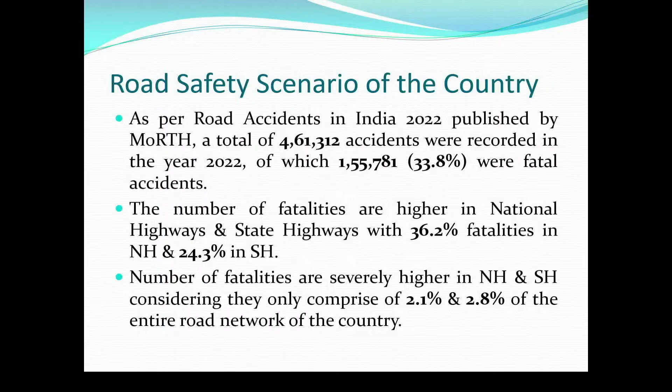If we see, even if we consider the national highway and the state highway together, they constitute around 6% of the network of total roads in India, and together they carry 55 to 60% of road fatalities. What about the other categories of roads within the jurisdiction of state governments? That network is about 6.3 million. What to do with that vast network? This network is concentrated, and its problems are totally different from the other roads. Here comes the role of road engineers—we have to have different strategies for different categories of roads.

As far as black spots are concerned, these are the areas which are prominent on the roads and can be easily addressed. But unfortunately, they constitute only 4.5% of the total road network on the national highways and state highways. So what about the remaining? We do not know what to do about it.

So we have to have a corridor approach. If we want to address the problem of fatalities, we cannot leave the remaining 95% of the network without addressing the engineering problem. Now for black spots, we have a methodology for identification. And what about the remaining network? For that, we in the ministry have experimented a bit to find how to approach the whole network.

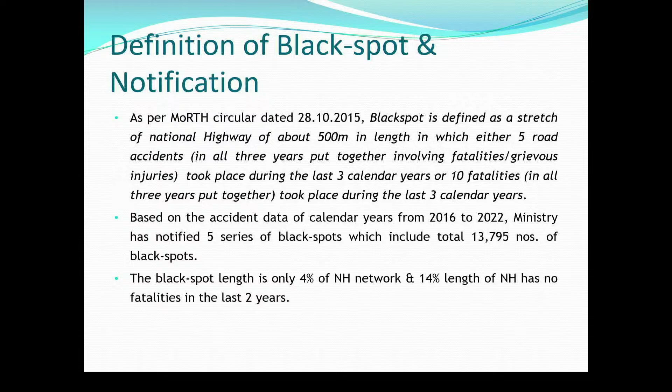The Center of Excellence, IIT Madras, was requested to carry out an analysis with the help of whatever eDAR data was available with them. It was found that 14% length of the 80,000 kilometer road has not witnessed any death in the last 2 years. With a criteria that the minimum length of the corridor should be more than 5 kilometers, you will wonder that 14% is significantly higher than the black spot stretch we are focusing on. So we changed our strategy and asked the questions.

So what to do with these stretches? Is there an engineering fault in it? When we compared this 14% aggregated length with the remaining adjoining stretches, we found there is no engineering defect. These stretches are as good as the stretches where there is death.

So now where to lay the blame? There is a blame game that it's a fault of the driver or it is a fault of some other event. So we have to identify what a highway engineer should do. What should we do to address these problems? This is the point I want to explain, how to address this.

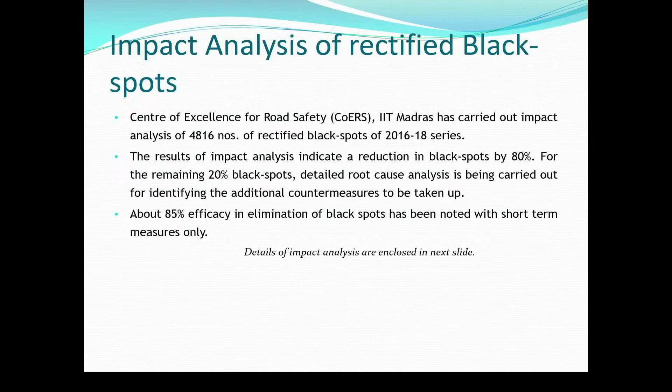This is the impact analysis which I just shared with you. The same experience, with details, was carried out by the IIT Madras Center of Excellence.

My request to the state government people is that the strategy for state highways, which are high speed corridors, should be like the national highway approach. For the remaining network, which is low density and low speed corridor, black spots should be addressed first. Maximum black spots are on the national highway and state highway, and the remaining network, about 6.3 million kilometers, being minuscule in density, cannot be covered on a corridor basis.

So eDAR data is already available, and the eDAR facility is available to all state governments. There you can select high accident locations and address those spots. You have to have a point-based approach, and we can achieve the maximum reduction in fatality at that point.

As regards the funding of those stretches, we can make a district level integrated program, including the national highway, state highway, and other roads, where you can have different strategies to address the different kinds of problems.

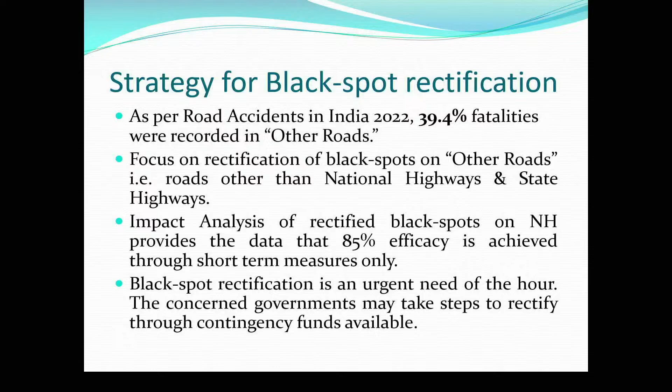This we have already discussed. Now, after the black spot, what about the corridors which are neither falling in the white corridor portion nor within your black spot corridor? There you have to have a corridor approach. At least you should carry out the road safety audit of 50 kilometer road length,

and also observe the operating speed, and segregate the urban sections and the rural sections, which is the main reason for accidents. Because we design the road at 80 kilometer per hour speed, but when we operate on the road designed for 80 kilometer, because of the roadside development and population, since the road is shared by the people also in India and population density is very high, you cannot maintain the same operating speed over longer stretches.

After every 10 or 15 or 20 kilometers, you will face one settlement and another settlement. So you have to adjust for the speed. That is the main reason for higher fatalities on such corridors. The best way is to segregate it speed wise. Suppose you have a consistent operating speed on this particular section, and for the remaining you have a different operating speed consistently. So you can plan accordingly.

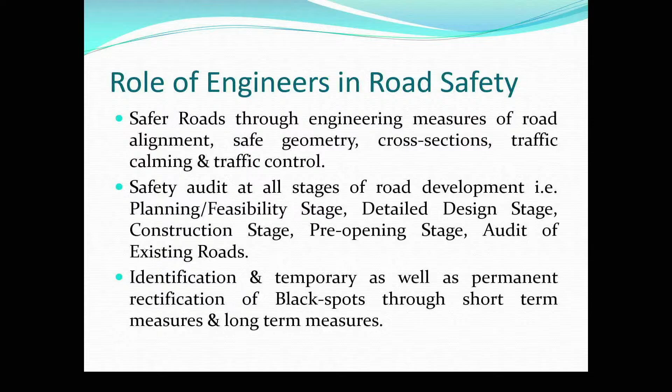It can help you to have a proactive approach to black spots. In the black spot definition, you have to wait for 3 years. So in the ministry, we experimented: should we wait for another 3 years for the formation of the black spot? It was decided no, it cannot be business as usual. So first, wherever there is a fatal accident, each and every spot should be visited, and after visiting it should be decided whether really some engineering measures are required or not.

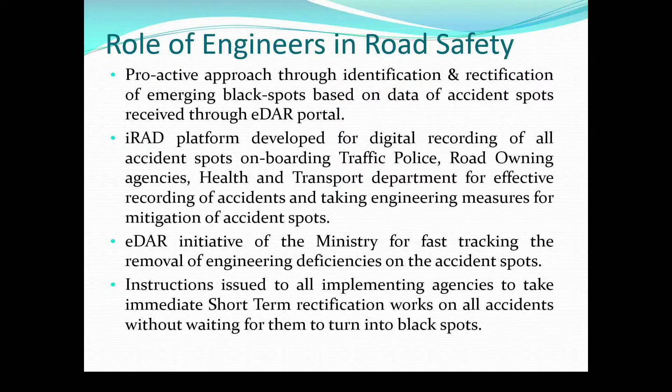If no engineering measures are required, it should be recorded by the engineer that the road is perfect. Thereafter we can go to the spots where engineering measures are required, and there the first step is to provide temporary or short term measures, so that it should not qualify as a black spot. And we should observe, even if it is shifting, there is some reduction in black spot formation. White corridor we have already discussed.

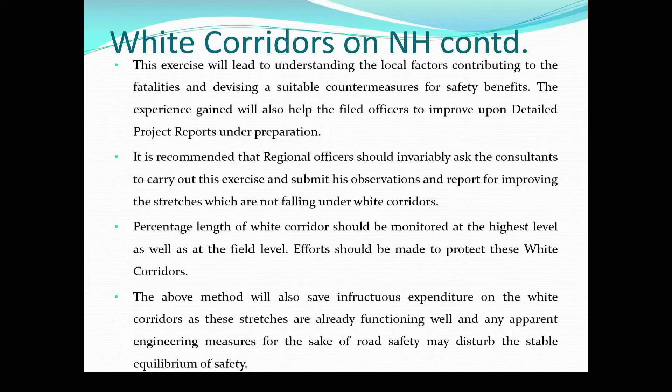We should have forgiving highways. First of all, for forgiving highways, we have to address the need of speed management. We have to decide what are the speed corridors. We have to segregate on the basis of speed. Then according to that speed, we have to provide the transition zone. Suppose an urban area is coming, so we have to forewarn him. Urban area is coming, proper signage should be provided.

It should be followed by traffic calming measures, irrespective of what was the design speed you considered at the stage of designing it. That should not be completely ignored. But where there are settlements and the area is being used by people, pedestrians, cyclists, the speed should be moderated irrespective of the design speed at the time of design. That can only help us to reduce the deaths.

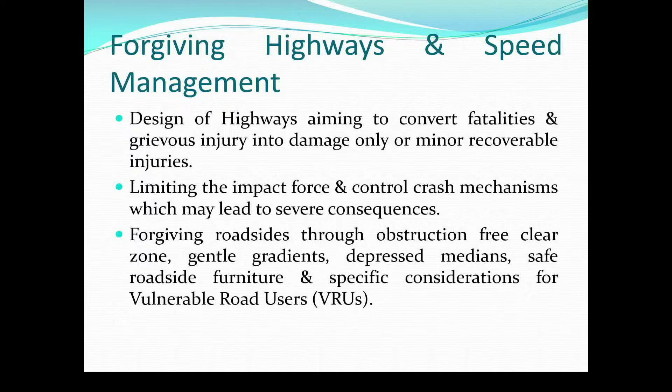And more infrastructure should be provided for the vulnerable road users, typically pedestrians, cyclists, and wherever there is a high density of two-wheelers, preference should be given to two-wheelers. For speed management, right now we do not have any network of monitoring speed. Some say that we should apply ITMS, but it is at the preliminary stage. Although NHAI has tried some, we do not have enough data for controlling speed, and it requires integration with the police and technology people, so that enforcement can be made effective, but it is not happening at this stage.

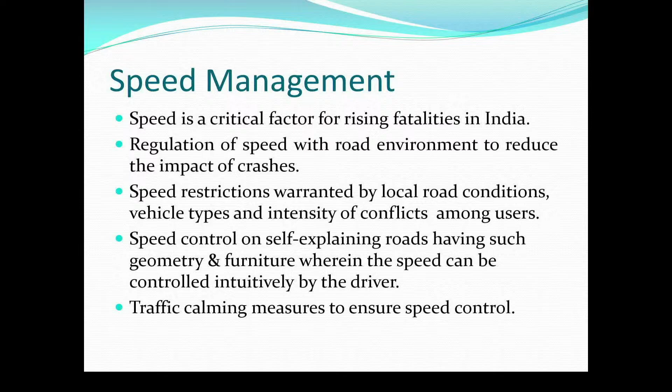And I would like to share one table from the safe system approach. It clearly mentions what the safe system speed is. So this should be kept in mind: roads and road sections with possible crashes of cars with vulnerable road users. It clearly indicates that the safe system speed should be 30 kilometer per hour, and this should be the criteria. Suppose there is a 100-kilometer two-lane road, and we have designed it at a design speed of 100 or 80 kilometer per hour.

But whenever we reach sections where the crash data indicates fatalities with cars or scooters and pedestrians are dying, we should not care about the design speed. We should only think that the safe system speed is 30 kilometer per hour, and we should sacrifice the speed and design it as if it is 30 or 40 kilometer per hour, irrespective of any code provision of IRC 73 or whatever. If we want to reduce fatalities, the same approach should be adopted preferably at the time of design. We should not be fascinated by the design speed. We should sacrifice that speed and try to build in the safety.

Same way, the road section with intersections with possible side-on crashes. There you will observe such things where there are a lot of junctions, the weaving lengths are not available, and junctions are not properly designed. There you can adopt the safe system where speed is 50. And the road section with possible frontal head-on collision, that is a two-lane road, the safe system speed is 70.

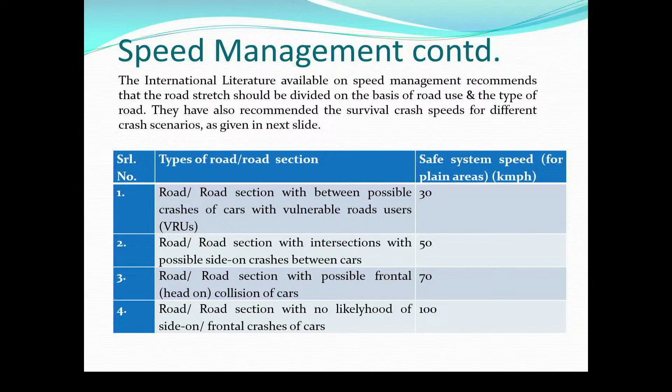District Road Safety Council, we have constituted; it is mandatory for the District Road Safety Council to have meetings. Unfortunately, District Road Safety Councils are not equipped with road safety auditors. So my request to all the state governments is, because IAHE is ready to provide road safety audit training to all state government officials and engineers, whosoever wants, free of cost. Only they have to bear the TA/DA cost. But nobody has approached the IAHE or the ministry for the training of their engineers.

So my request would be for all the chief engineers or all the people of the state government to send at least 2 persons from each district who should be trained free of cost for the road safety audit.

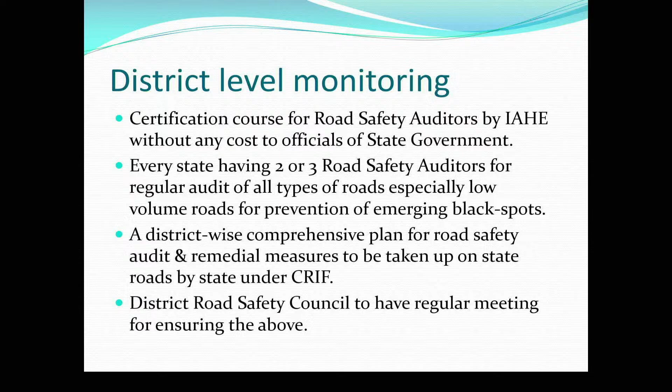Thank you, Mr. Pankaj, for giving the in-depth knowledge of the road safety scenario and perspective of the ministry in improving the road safety of the national highways in India. Now, I would like to request Mr. Tushar Vyas and Shri Amit Munjal for making a presentation on inventory and condition survey using NSV in NHAI.

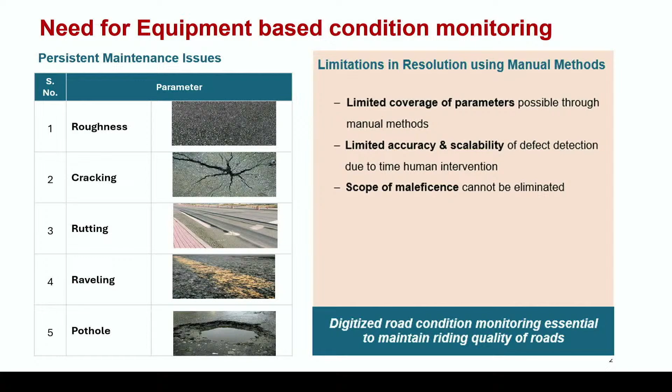Second, the accuracy and the scalability are also limited. And there is always a doubt on the data because the chance of manipulation is always there. So what is the existing arrangement of NSV? In the existing contracts, where the ministry has already introduced NSV, the authority engineer or the independent engineer conducts 2D testing, prepares the report manually and submits that report through the data lake to the RAMS cell in the NHAI headquarters. And after data cleansing by the RAMS cell, it is submitted to the RAMS portal.

Now what is the issue in this system? The first issue is incomplete data collection. Second, which we have paid the price for heavily: the survey was conducted 6 months back and we are receiving the report after 6 months.

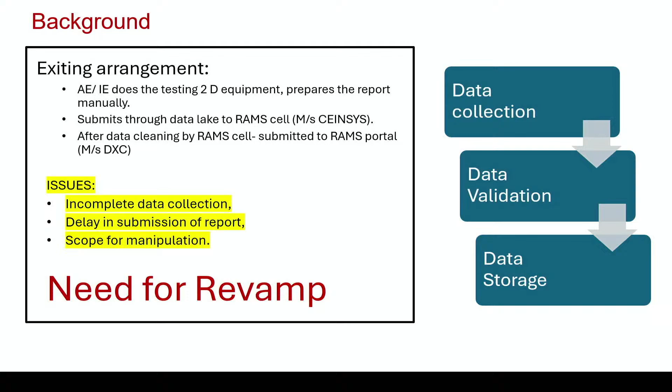And lastly, as I have already told you, there is always a scope of manipulation because manual intervention is there. This is the machine which we are now using for conducting the network survey. This is a very high-class, very modern machine, and its components are given in the figure.

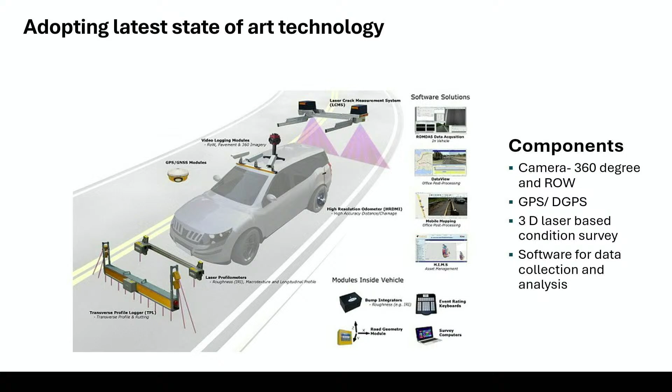And what we are doing at present is that in this NSV project, the data is captured by the centralized NSV agency, which NHAI have engaged through a separate contract. In 48 hours, whatever data has been collected by the NSV is transferred to the NHAI headquarters. In the NHAI headquarters, there is a separate team, a separate cell, which looks after these reports, in which 20 to 25 young engineering professionals have been placed.

And the reports which have been sent by the NSV team on the ground are processed, the report is generated and reviewed by the expert in 10 days, and in 2 to 3 days it is onboarded onto the GIS dashboard. So this is the point I would like to highlight.

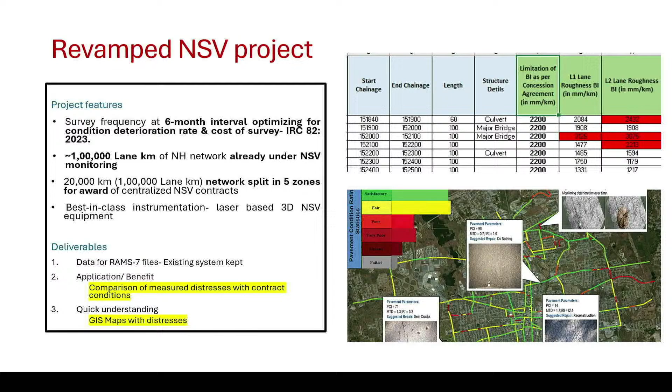This is one particular aspect in which you can see there is a crack. This is a particular result of the NSV survey which we are carrying on, and in this we can also see a pothole with location. Our survey is giving the location and also the type of defect. In the left part there is cracking, in the top right slide there is a pothole.

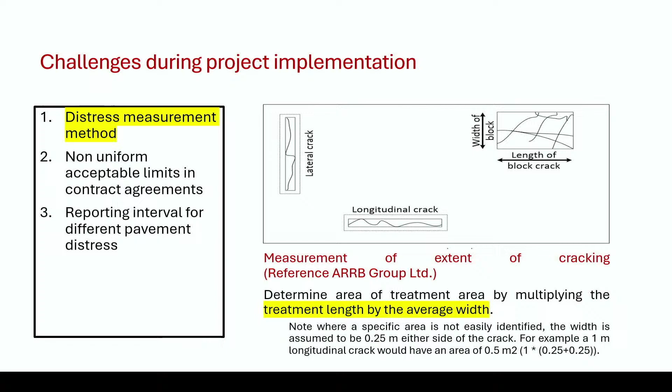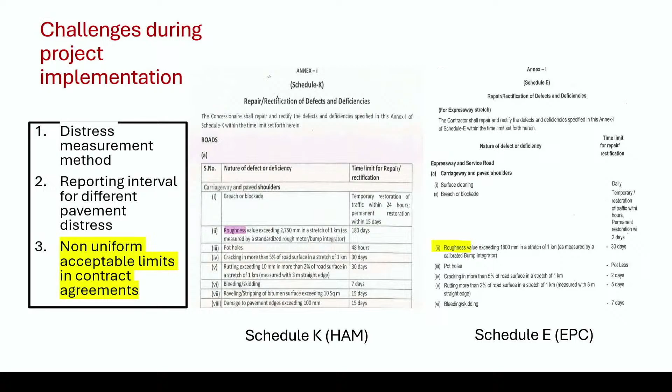Sir has given the context of this revamped NSV project which NHAI has now started. I will discuss what we are now getting, what are the outcomes of this project. So we have 3 deliverables in this project instead of 1 which we were getting from last many years, which is deliverable number 1 in this project also. We have kept this deliverable intact in this new project, which is related to RAMS. All the data required by the RAMS we have kept intact in this project also.

But additionally, 2 deliverables have been added. Second deliverable is comparison of the measured distresses with contract acceptable limits. This is very useful for professionals working in highway sector, because most of the time we are doing the contract management. In this project, we have linked the NSV outcomes with the contract acceptable limits.

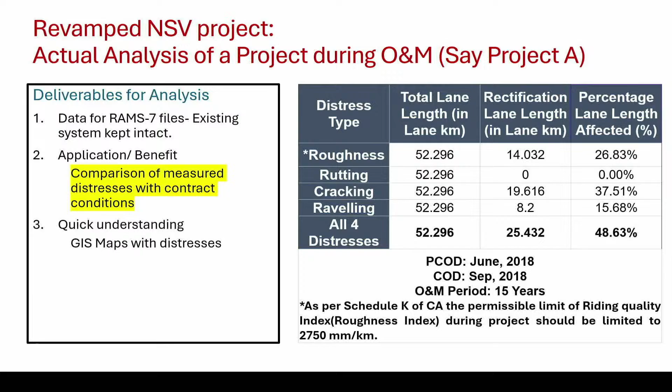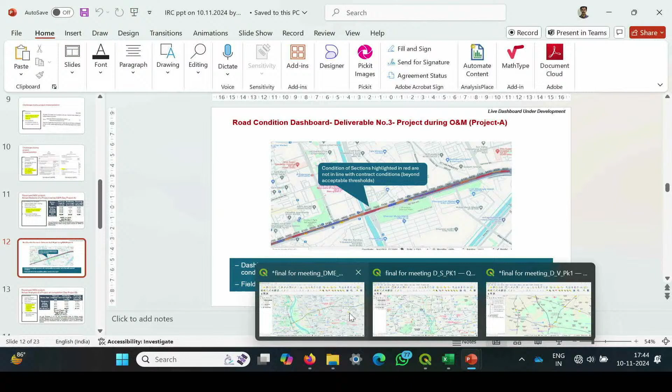Our deliverable number 3 is showing this huge data, which is normally in Excel files. Lakhs of cells are there. It's difficult to analyze it quickly. We have developed a tool in which these distresses are being presented in GIS color-coded maps. I can show this in real time, that this is the project, and if I have selected roughness as the layer on this GIS map, we can zoom in and see based on roughness, this color-coded map has been prepared.

We can see all 6 lanes with the chainage where roughness is under permissible limits, that is 2000 mm per kilometer, where it is under fair moderate condition, which is 2000 to 2400 mm per kilometer, which is shown in orange or yellow, and the sections where it is not fulfilling our contract acceptable limits, that is red.

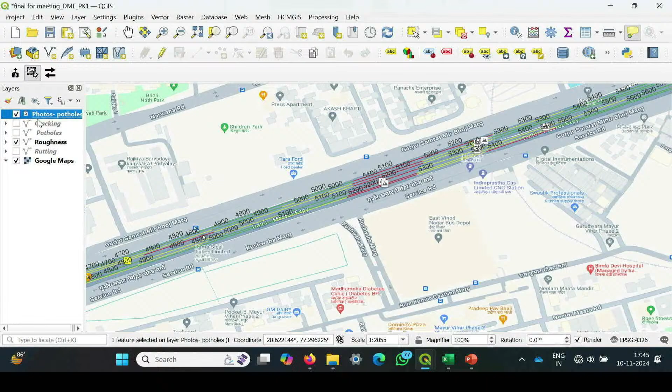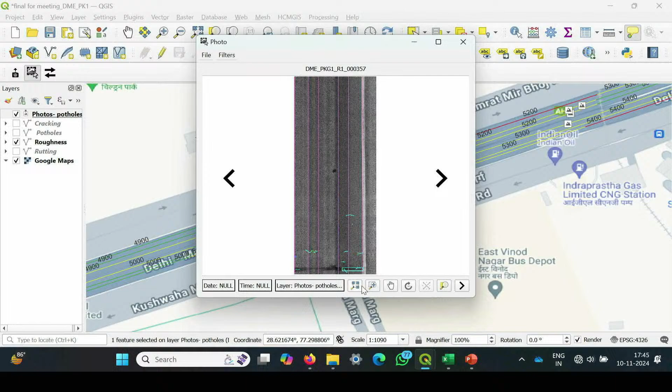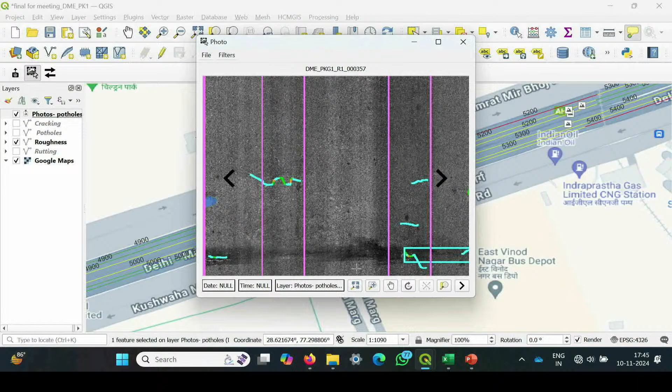In this, we have also taken the photographs of potholes. If I select this layer, which is photos of the potholes, we can see it will pop up all these photographs. And if we select this photo, we can even zoom in sitting in our office and see different cracks and potholes. We don't need to go to site if we have this kind of data with us. So this is a new deliverable we have added.

This was the project under O&M. We have also done, for understanding purpose, one project which was recently completed, and the proposal came for issuing of completion certificate. When we did this NSV testing under this new revamped project, you can see that 30.18% of lane length is not fulfilling our acceptable limits.

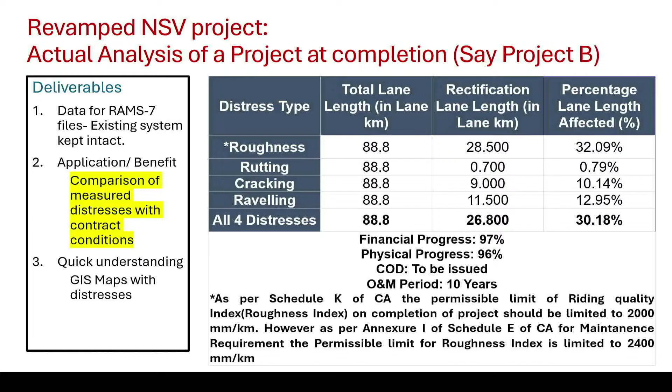So this project has been planned in a phased manner. Phase 1 will cover around 25,000 kilometers, capturing around 1 lakh lane kilometers. We will follow the existing contract acceptable limits in this phase, and phase 2 will cover all the O&M stretches, which will be more than 40,000 kilometers center line. And in phase 2, we had planned the introduction of PCI, but we are glad to inform that we have shifted this objective from phase 2 to phase 1. Now, in the current project itself, we are doing PCI categorization.

Also, the distresses being reported through this NSV testing shall be integrated into the NHAI One mobile application, which is being used by our supervision consultants and our field units, so that these defects which have been observed by NSV can also be rectified in the existing system.

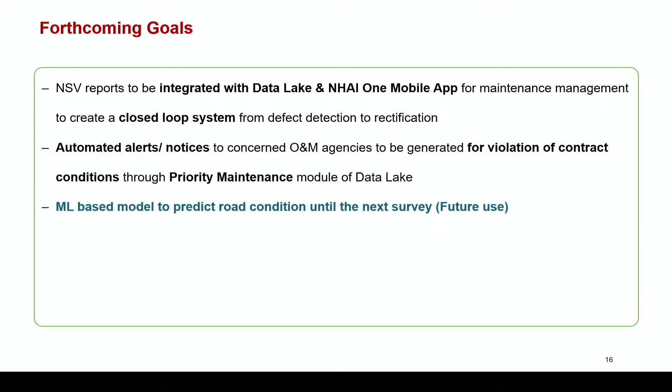Also, the issuing of notices and alerts to the supervision consultant and to the contractor or concessionaire is being planned in an automated way. And we have also received a new suggestion that, based on the quality data we are getting, we can now deploy a machine learning based model to predict the road condition in the future.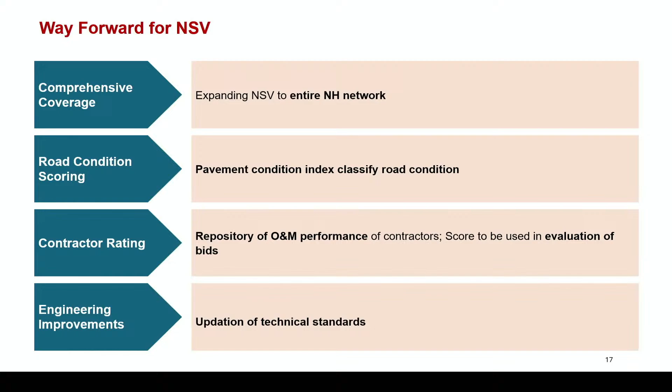So the way forward of NSV in NHAI is that, as we already mentioned, we will be expanding to the entire NH network. We will be doing road condition scoring based on PCI. Also, we are planning to do contractor or concessionaire rating based on the PCI, so that in future this information can be used in bid evaluation also. And last but not least is continuous engineering and equipment improvement, where our technical standards and acceptable limits shall be improved based on the learnings.

Thank you. Thank you, Amit. I must place on record that Amit Munjal has done excellently in NHAI in developing this NSV cell, and he has put a lot of effort into developing this module. So I must appreciate the work done by Amit Munjal.

Thank you, sir. And particularly as a way forward, NHAI is now moving further to rating of the contractor based on the NHAI One application, in which each and every defect is recorded live, and there is an automatic system of putting a penalty on the contractor. So there should not be any kind of subjectivity; everything is live and on the record.

So it will put an automatic penalty on the contractor for not maintaining the road in good condition, depending upon the set criteria already fixed. So we are moving further in this direction, and by utilizing AI we will improve further. I think this will pave the way forward for NHAI to maintain good quality roads. Thank you.

Now, I would like to invite Shri Narendra Sharma for construction of the major bridge across the Sharavathi backwater in Karnataka.

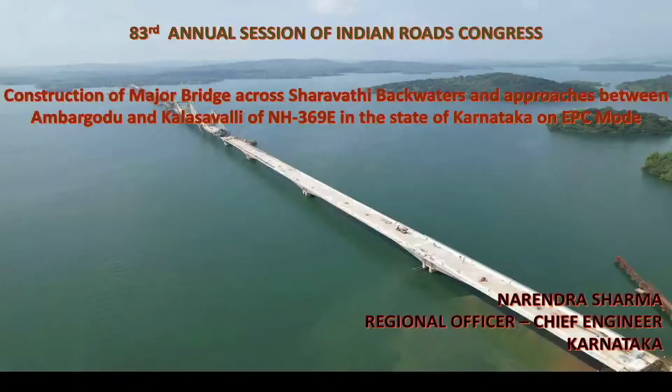Good evening to all. First, I introduce myself. I am Narendra Sharma, presently posted as regional officer in the Ministry of Road Transport and Highways at Bangalore. Today, I am going to make a presentation on the construction of the major bridge on the Sharavathi backwater on NH 369E.

The NH 369E connects NH 69 at Sagara town, passes through and joins NH 766C. There is a missing link between two places, Kalasavalli and Ambargodu. Therefore, the Ministry sanctioned a project called Major Bridge at Sharavathi Backwater in March 2019 with a cost of 423 crores. The civil cost of the project was 363 crore.

After tendering, the project was awarded at a cost of 360 crore to Messrs. Dilip Buildcon in JV. The project was started in December 2019. The period of construction was 3 years, but the work could not be completed on time due to a water level issue in the backwater.

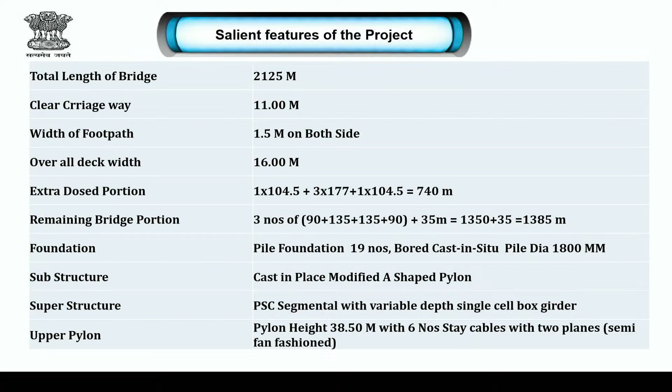The upper pylon length is 38.5 meters, and we provide 6 stay cables on both sides. It is semi-fan shaped.

In total there are 18 spans. A1 and A2 are the abutments, and the maximum span size is 177 meters. The middle 5 portion is the extra dose portion, having a 104.5 meter span on both sides and 3 spans of 177 meters.

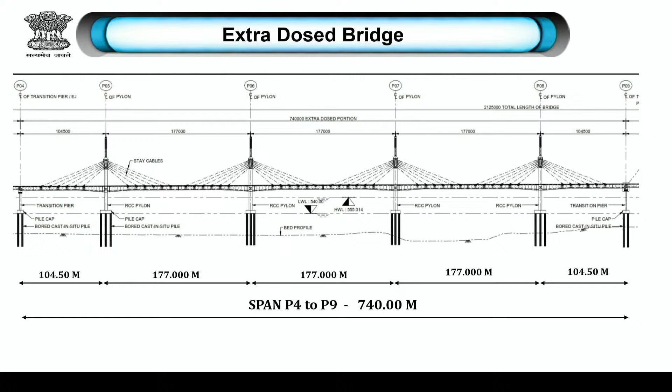This extra dose design is from pier P4 to P9, and this is a balance cantilever bridge. We provide 3 modules of 450 meters for the balance cantilever so that it works as a continuous beam structure. In the last A2 abutment side, we provide a 35-meter box girder.

In our initial DPR, this span was not there, but the designer provided it to place the abutment on land, and therefore he provided a span of 35 meters between P17 and A2.

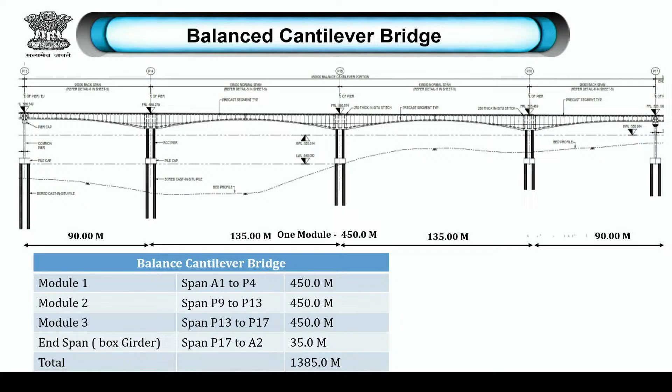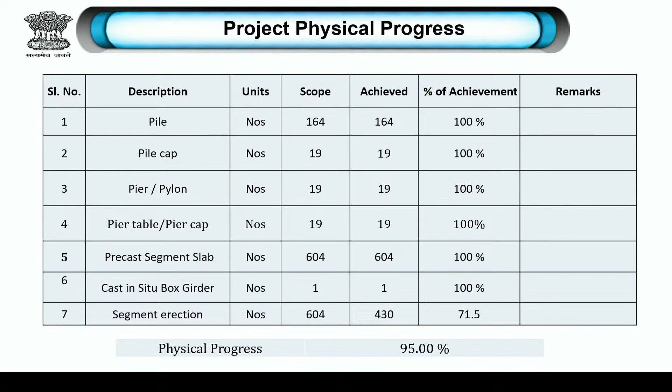At present, in terms of physical progress based on payments made till now, it is 95%. For materials, we use high grade concrete, M60 and M65.

For pre-stressing steel, we used LRPC - low relaxation pre-stressed concrete strands with high tensile strength of 1860 MPa. Stay cables are also LRPC strands. We use anchorage 12, 19 and 22 for pre-stress steel, and anchorage 37 and 48 for the stay cables.

In anchorage 37, we are using only 32 and 33 strands. The remaining strands will be dummy, so if in future any strand fails, we can replace it. Because we use iso-tensioning in the stay cables, every strand or tendon is stressed individually, so any strand or tendon can be replaced easily in future.

For expansion joints, we provide modular expansion joints, 2 types: 500 expansion and 750 expansion.

For bearings, we provide spherical bearings and POT-PTFE bearings, but we provide expansion joints only at 6 locations: both abutment sides, the last box girder piers, and where the modules change from one module to another.

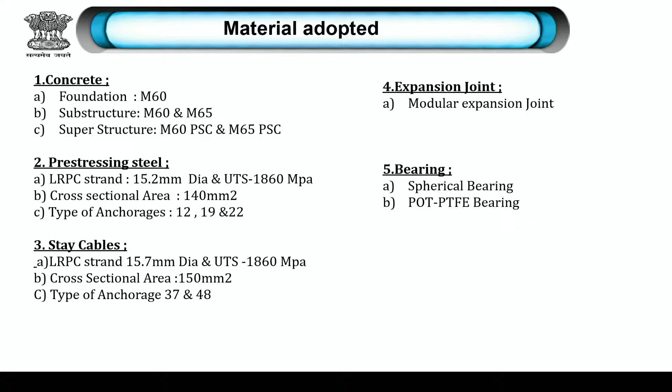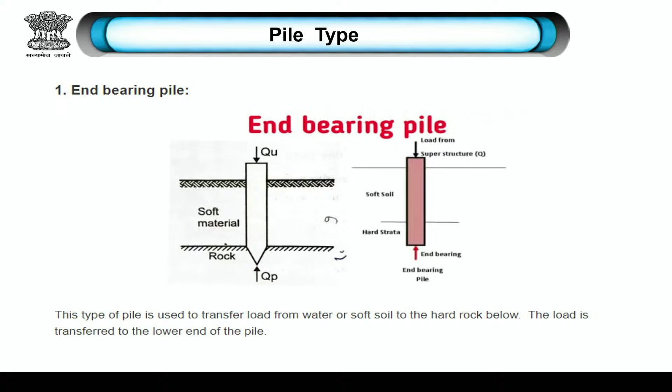Thereafter, pile capping. We did the pile capping by 2 methods: first is the coffer dam, and second is the sacrificial slab casting.

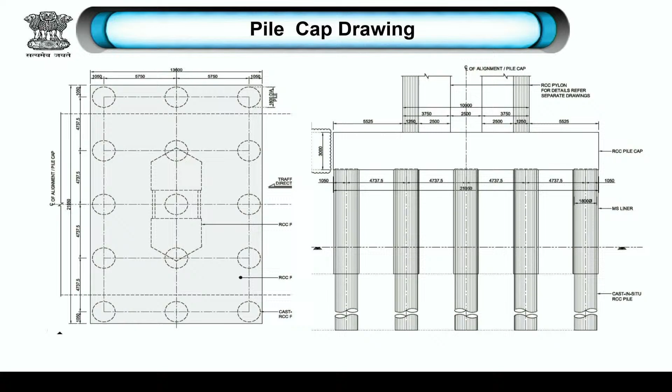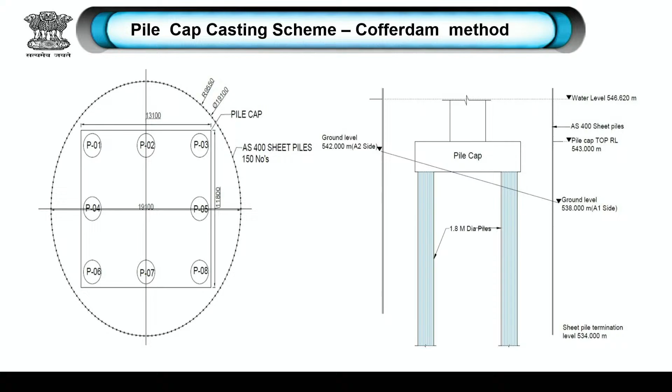In the coffer dam method, we fix the coffer dam, then dewater the pile cap, and remove the excess pile by hydraulic breakers. Then we fix the reinforcement and shuttering, and thereafter pour the concrete.

Second is the sacrificial method. We use this sacrificial method in most of the portions, except towards the abutment side.

In this method, first for pile construction we insert a liner. When going for pile capping, we first remove the extra liner, then remove the extra concrete. Thereafter, we provide reinforcement etc. and then place the concrete.

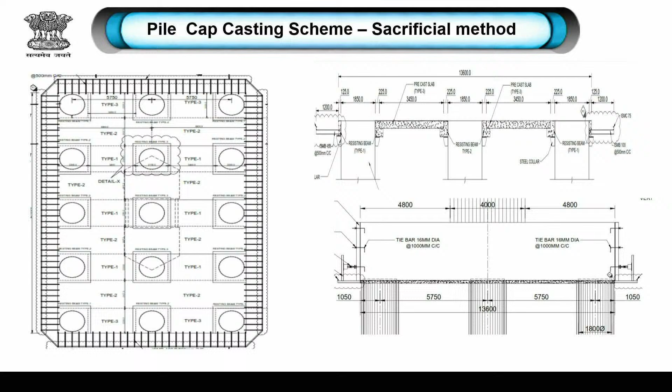In between, we also provide a sacrificial slab. That slab will remain even after construction.

This is the pylon. The pylon has three segment portions. The first is the pile cap. Thereafter there is the lower pylon, with a height of 15 meters. Then the pylon table, and the upper portion is the upper pylon, with a height of 38.5 meters.

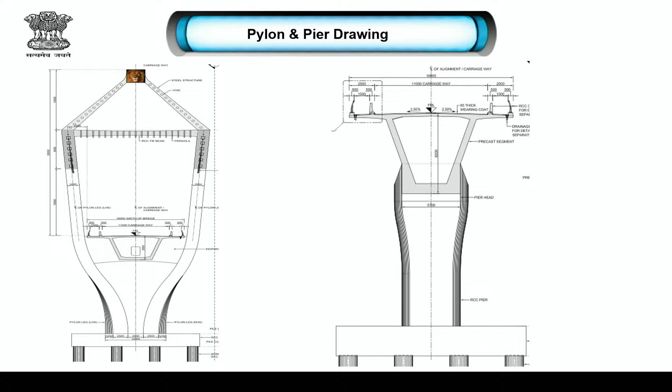We constructed the lower pylon in 3 lifts, each lift being 5 meters in height. In the first lift, we used the base of the pile cap for construction. In the second lift, we anchored the shuttering with the lift 1 portion. Subsequently, we cast lift 3.

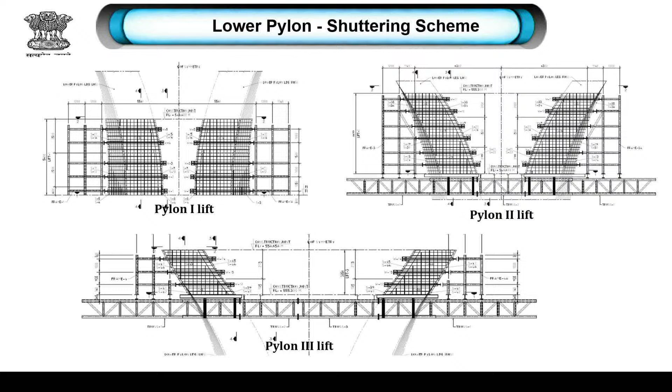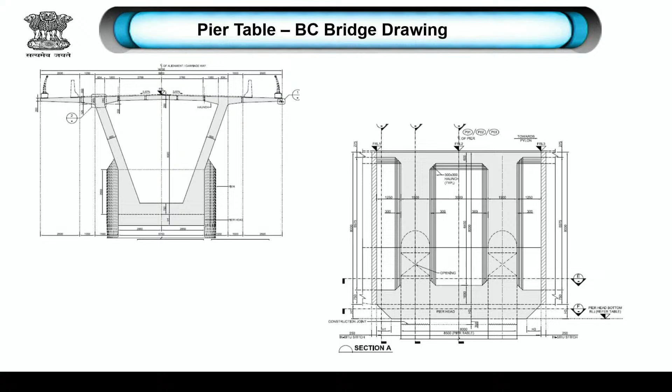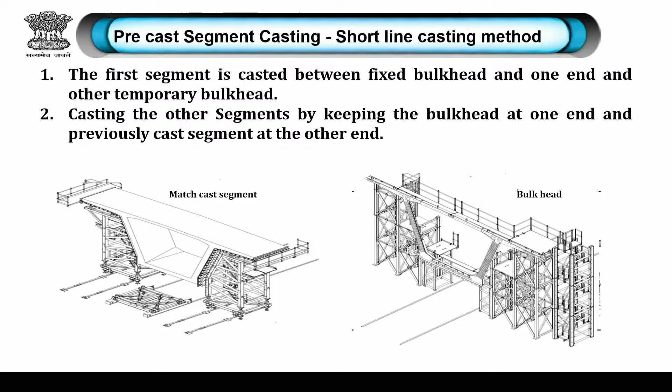And thereafter, the precast segment casting. For precast segment casting, we use the short line casting method. In this method, the permanent bulkhead is provided on the right side and a temporary bulkhead on the left side. Then we cast the first segment, and thereafter we move it towards the left, which will act as a match segment for the subsequent segment.

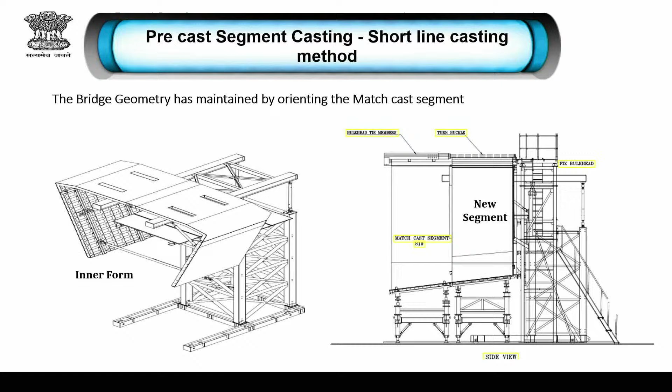If the number of spans are more and the size of the spans is less, then we use the long line casting method. This is the lifting.

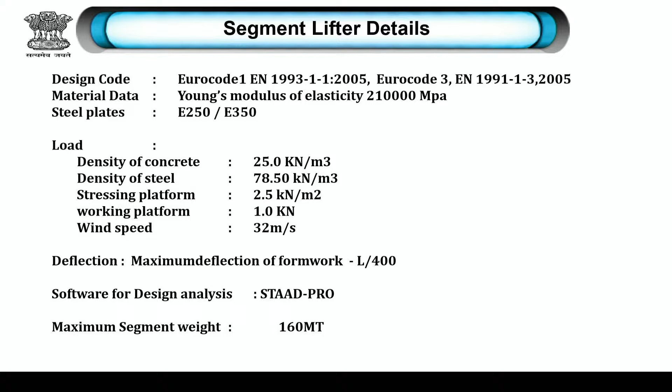Before this, we use the Eurocode lifting system. This is designed for 32 meter per second wind speed, and the deflection parameter is L by 400. The L is the length of the lifting mechanism, which is a beam. The length of the beam is L.

This is the segment erection. After completion of the pier table or pylon table, we lift the first segment, and it is stitched with the pier table. Then after, we do the stressing.

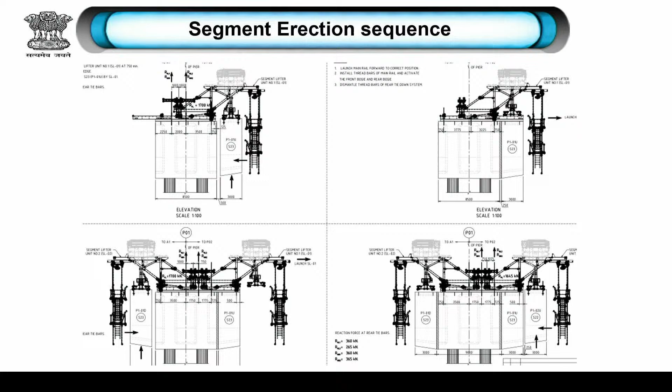Then the subsequent segments were lifted and attached with the previous segment by glue, and thereafter we did the tensioning and stressing of the tendons. This is the tendon versus segment erection. This is our segment tendon layout drawing.

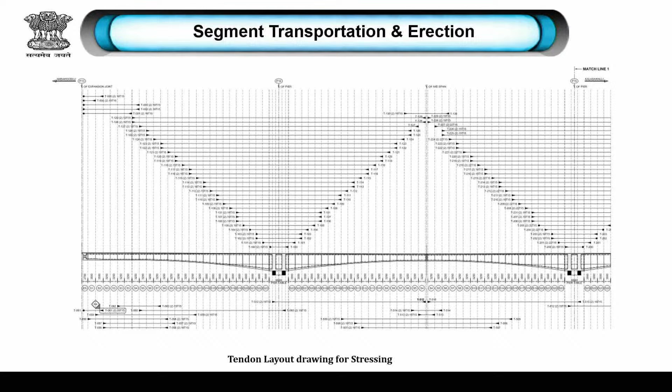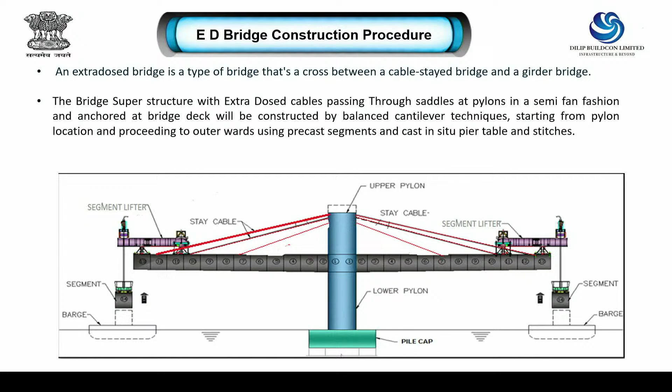Thereafter, at present, the stay cable erection is going on site, and we are using the technology of the Freyssinet for the cable stay erection. We are providing the stay cables. First, we erect 6 PSC segments, then we erect the stay cables and install them on the 7th segment. Thereafter, we repeat this again. In total, 6 stay cables are used.

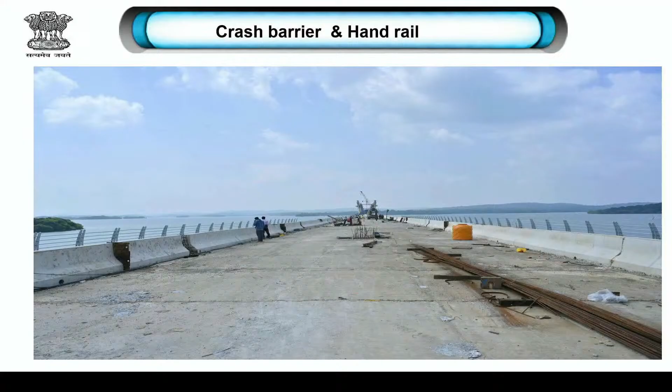The challenges - we encountered two things, and therefore our work has also been delayed. Number one, during 2020 to 2022, there was heavy rain in Karnataka and the water level was too much, more than 540 meters, because this bridge is being constructed on the reservoir side of a dam. For electricity generation, they have to maintain a minimum water level of 540 meters. Our pile capping activity was designed accordingly, but due to the heavy rain and some activity going on in the dam, they did not lower the water level below 540. Therefore, our pile capping activity was suspended for more than 1.5 years.

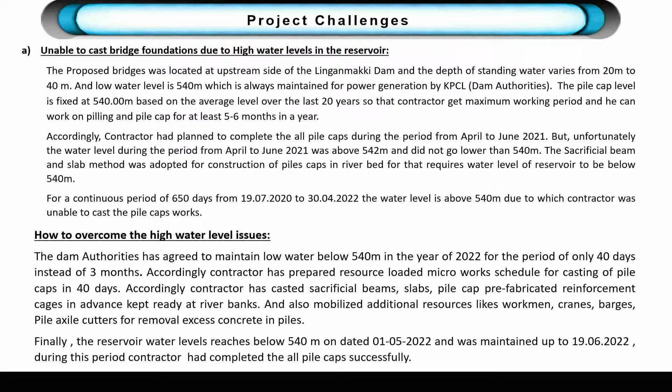But that time we utilized by casting the segments, and we completed all the casting during that period. The second problem we encountered was last year, when there was less rain in Karnataka and our water level went down to 545 meters, because for erection there is a requirement - when we transport the segment from the casting yard to the pile cap, a minimum water level difference is required.

Hello, one question. One question is received from Shri P. Yuganand, Deputy Chief, Highways Department, Tamil Nadu.

I agree with you, this is what I told you. Even if you carry out the road safety audit and make a good road which is compliant to all codal provisions, still the accident rate will not reduce. The problem is that simply making a good road does not eliminate accidents because it is a multi-factor event, which includes human behavior, vehicle engineering, and also the environment in which you are traveling. So the role of the road engineer is to provide good infrastructure, which NHAI has already done. The next step is emergency care, speed management - even if you have provided good roads and despite all these things accidents are not reducing, which you have already mentioned, it is not the fault of the audit. It is because we have not addressed other problems at ground level, and that is why we have 4.5% black spots and the white corridor at 14%. What about the remaining? That has to be addressed in a different manner. You have to bring in the emergency care system, you have to measure the operating speeds, and you have to control the behavior of the people through enforcement, campaigning, and the licensing system. Only when all these things come together will fatalities come down.